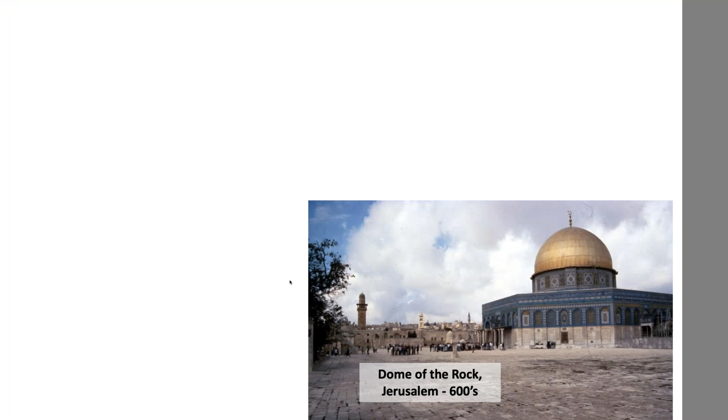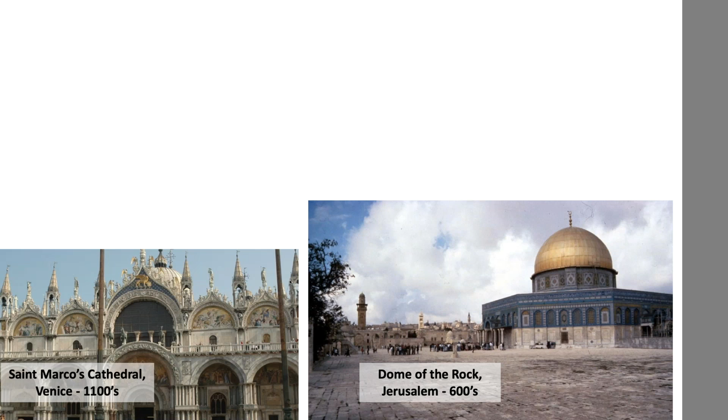But the first thing you need to know is that metal roofing is not something new. It's been around for about 3 millennia, and there are many structures that still exist. You're looking here at Dome of the Rock in Jerusalem, which was built like 1,400 years ago following the Arabic conquest of that city, and many other applications throughout Europe and the Middle East, and in truth all over the world. It's not a new thing.

Interestingly, it sits on top of the Jewish temple ruins, Temple Mount as it's called, and the very first recorded history I saw of metal being used as a roofing material is actually in the book of Kings and 2nd Chronicles. It was Solomon's temple. So Solomon's temple, the way I read scripture, was also having a metal roof clear back 3,000 years ago. That was about 970 years BC.

And of course, it's used in residential applications as well on millions of homes. Metal roofing is about 31%, that's this year's figures, year to date, of the commercial industrial roofing market as defined by FW Dodge.

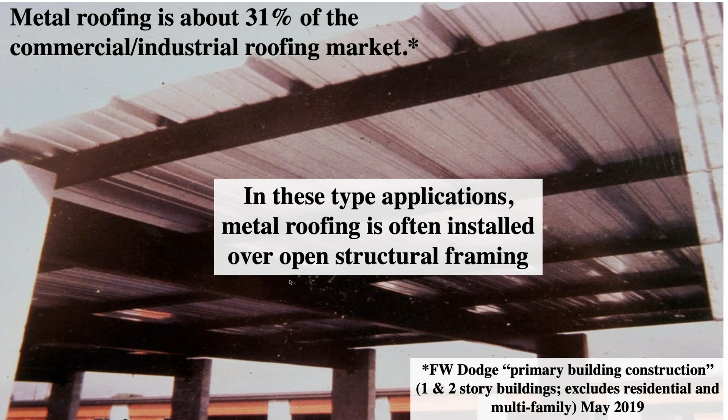And in these type applications, metal roofing, as you see in this slide, is often installed over open structural framing. It's structural roofing, so it's able to carry loads from support to support. And it's about 13% of the residential roofing market. This also is a figure from as of year end last year, 2018, published by the Metal Roofing Alliance.

You don't see metal roofing a lot because in many cases the applications are in very low slopes, as you see here in this slide. So people tend to think, well, gee, there isn't that much metal roofing around, because they're looking at steep slope roofs that are mostly residential applications. And metal only occupies about 13% of that market, which is also a growing figure. But in industrial and commercial, larger projects, it's used quite extensively, more so than any other single roof type.

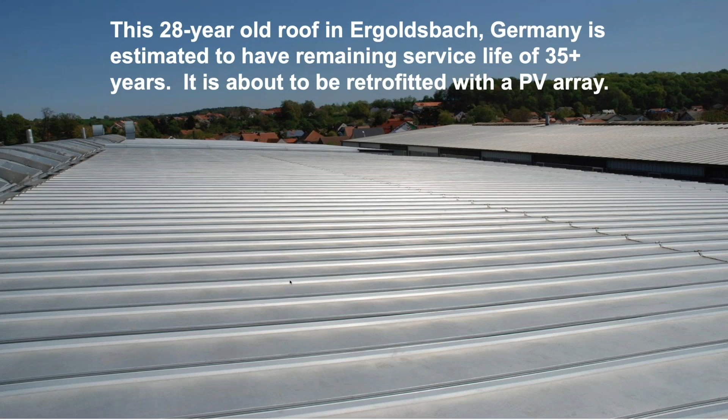Metal roofing is quite sustainable. Galvalume, I trust that many are familiar with the term Galvalume. That's a coating on carbon steel sheet, and that was introduced to the marketplace in the late 70s. And the Galvalume standing seam roof is now proven to have a service life between 60 and 70 years. So coated steel roofs have a service life of over 60 years.

Well, what does that mean to us? What it means is that we can still install solar on a roof that's 30 years old and never have to replace the roof during the life of the solar. So there's an enormous inventory of metal roofing out there, and that's why it's important to know and understand something about it and something about mounting solar on it.

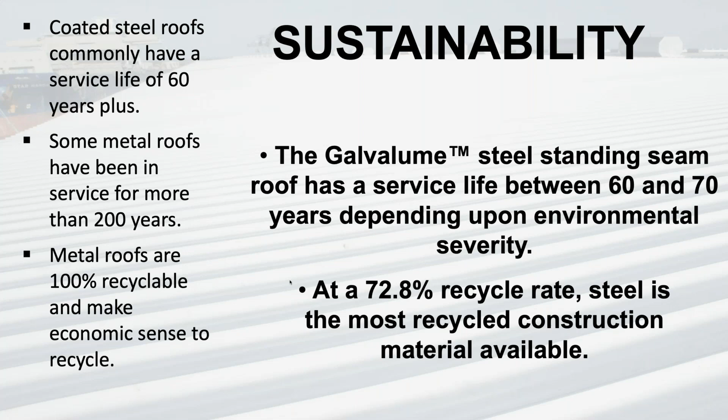Metal roofs, by the way, are also environmentally friendly, as you see in that last bullet. They're 100% recyclable, and they actually make economic sense to recycle. In other words, it's a profitable industry to recycle metal roofing.

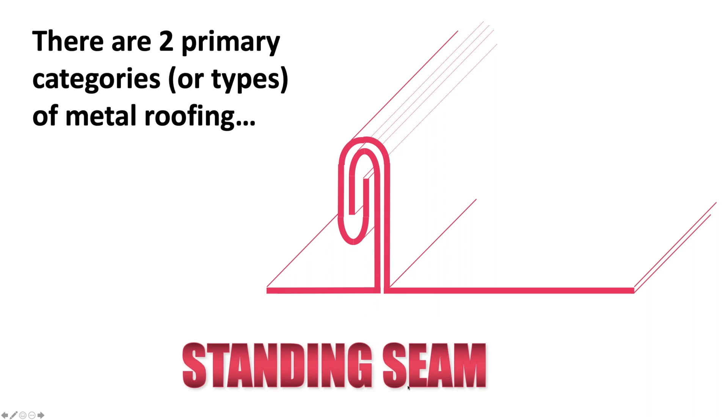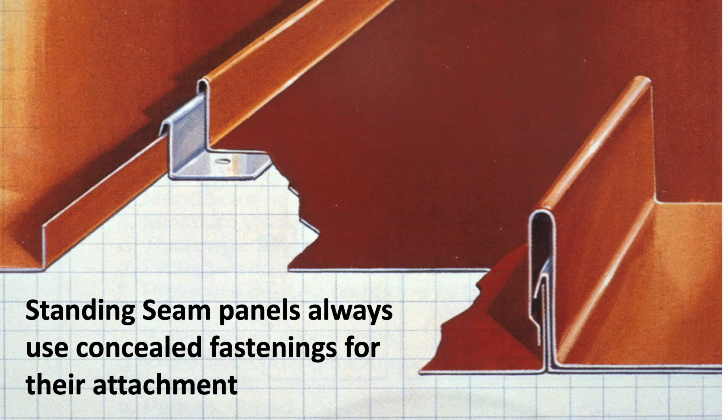There are 2 primary categories or types of metal roofing. The first is what we call standing seam. And standing seam profiles will always use concealed fastenings for their attachment to the building structure. So how do you know when you're dealing with a standing seam roof? Well, if you go up on the roof and you don't see any exposed fasteners, it's going to be a standing seam kind of profile.

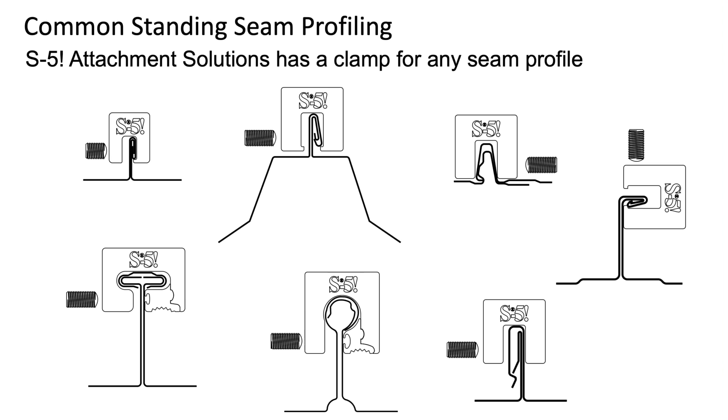And our company, S5 Attachment Solutions, has a clamp for any and all of the commercially available standing seam profiles that we're aware of in North America. This was our original technology, gripping a seam with a clamp, as you see in these diagrams. And I invented that technology back in 1991, patented it in 1992.

S5 is a very innovative company, and we've since come up with other attachment methods that are technically correct for attaching to other roof profiles as well. In fact, in total, we've been awarded, I think, 56 patents to date. Some of the original ones from back in 1992 have expired, but we still have some 40 plus that are active patents.

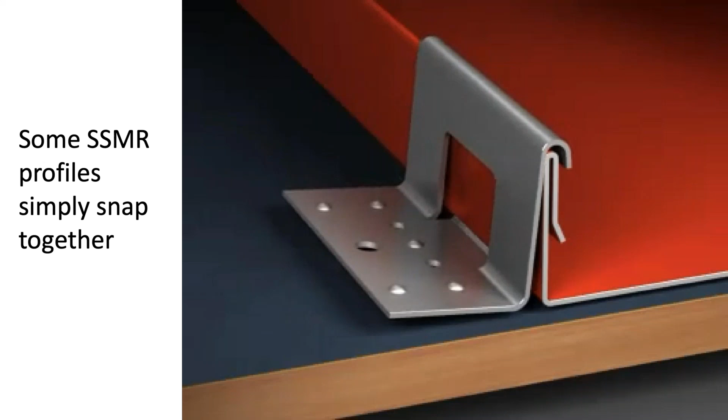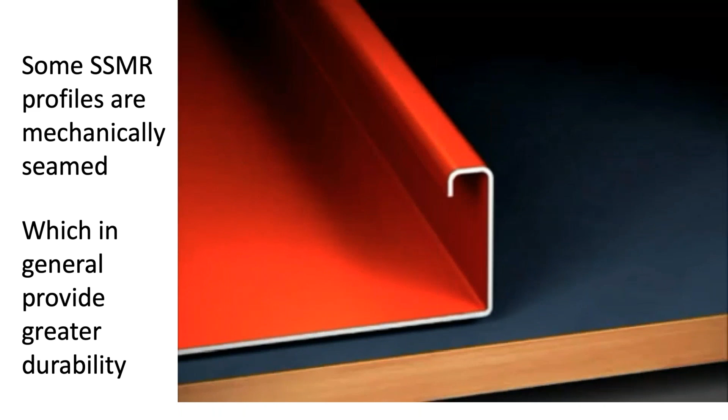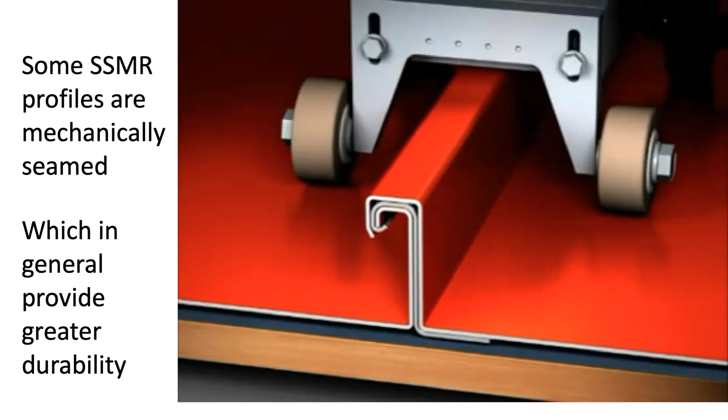Now, standing seam profiles are of two varieties. In the first case, they're snapped together seams, as illustrated by this quick video, where the male and the female components of the seam just snap together in the field. Installers tend to prefer these because they're easier to use than their counterpart, which is a mechanically seamed profile. Mechanical seaming tends to be more durable with respect to its performance under wind uplift pressures and so on. There you see a seaming machine that's closed and finished that seam.

And how do you know if you're dealing with an exposed fastened roof? Well, if you go up onto the roof and you see a multitude of fasteners holding it down to the structure, it's an exposed fastener roof.

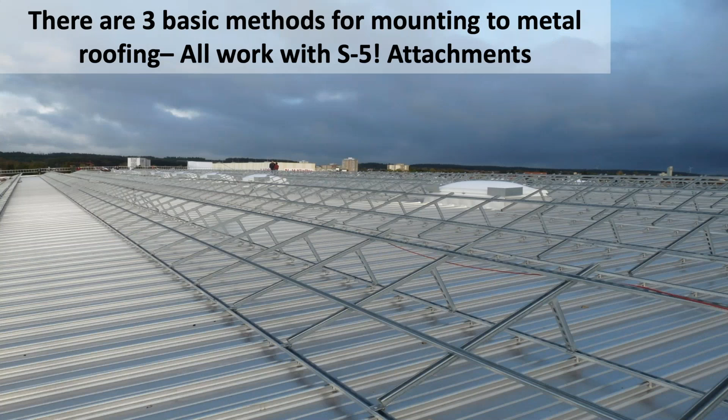So having dichotomized those two major categories of metal roofing, let's get into the methods that are used for mounting to each of them. There are three basic methods for mounting to any metal roof, and all work with S5 attachment solutions. The first is tilting modules to get them to their optimal sun angle.

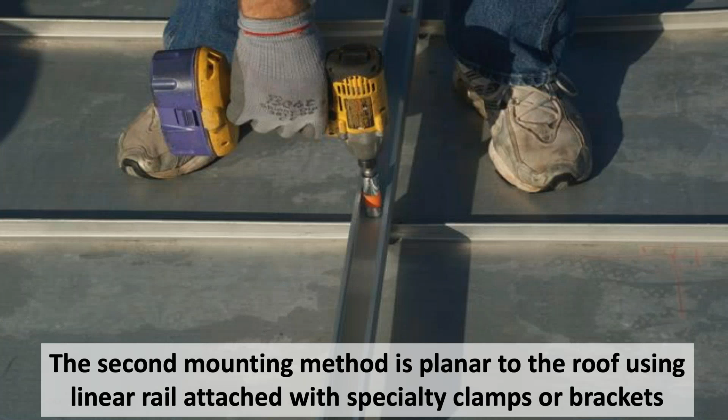And while that was very popular 10 or 12 years ago, as module costs have fallen and the cost of installed solar has fallen, in today's market, the premium cost of tilting is not too often justified economically. And so we're seeing a migration over the last 5 years or so to mounting modules planar to the roof, regardless of the roof slope, and just adding more modules, which proves more economically effective in many cases.

So the second mounting method is planar to the roof using a linear rail. I'm sure that you all are familiar with rail attachment. And the rail is then attached to the metal roof with specialty clamps or brackets, hopefully S5 clamps or brackets. When rail mounting to standing seam, we use a clamp. And as I said earlier, this was a rather revolutionary technology that was invented by S5 in 1991.

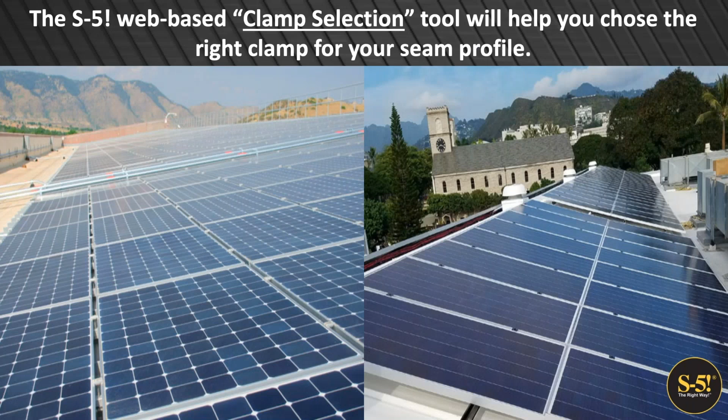Because there are many different seam profiles out there, we have a clamp selection tool on our website that'll help you choose the specific clamp to properly fit and achieve the maximum holding strength on any individual profile. Simply go to our home page and click the Learn More button, or go to the Resources drop-down menu at the top of the screen and select the clamp selection tool. And that'll give you some handy tips and graphics as to fitting certain S5 specific parts to specific seam geometries.

When rail mounting on face fastened profiles, S5 has 4 different options to attach rails. The first one attaches to sheet only, and the other 3 to structure. So we'll take a quick look at each one of them. There are some features and benefits to each one of these components that make them different from the next, and you get to choose what your preference is.

The Protea bracket works with either a side or bottom mounted rail. It can be used in either axis. It is height adjustable, requires no L-foot, as you can see in that image. The L-foot is part of the component offering, and that L-foot will turn around different ways. You're looking at it in a bottom mount rail orientation. You flip it over and it works in a side mount orientation.

As I said, it's height adjustable. No L-foot required or recommended. If you stand an L-foot on top of what you see in this slide, you're creating a moment arm. You're getting that moment arm so high that our tested holding strengths become invalid, because we don't test our parts that way. The next part is a solar foot.

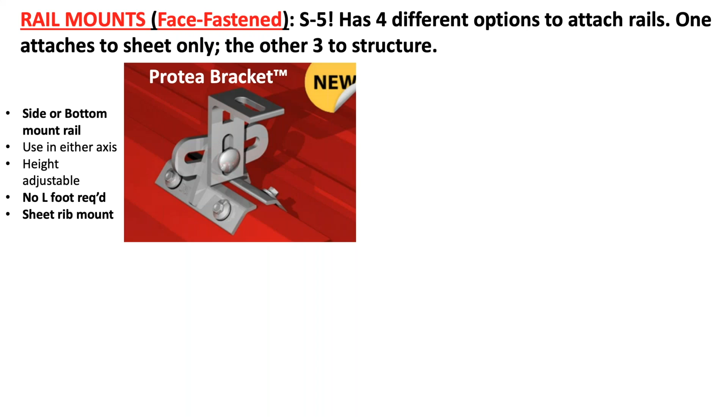So the advantage to the first one, the Protea, is that you can attach anywhere along the rib or seam of the roof. With the solar foot, you're attaching in the flat. This is a structural only attachment. It goes through the roof and into the structure, and it's compatible with any domestic rail producer's L-foot. In fact, any L-foot sold in the world that we're aware of. And it will mount rail in either axis on the roof as desired.

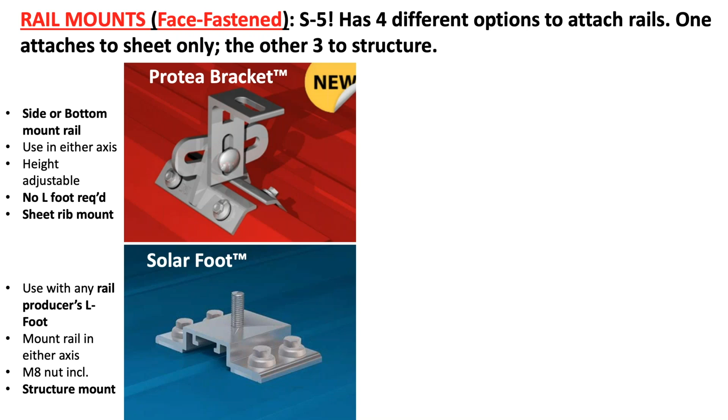The M8 nut isn't shown in that image, but it is included with the part. And as I said, it must attach to structure, and that's the way it's tested. It is height adjustable, and no L-foot is required with that part either. It sort of melds an L-foot with a solar foot all in one part for side-mounted rail. It again mounts to structure.

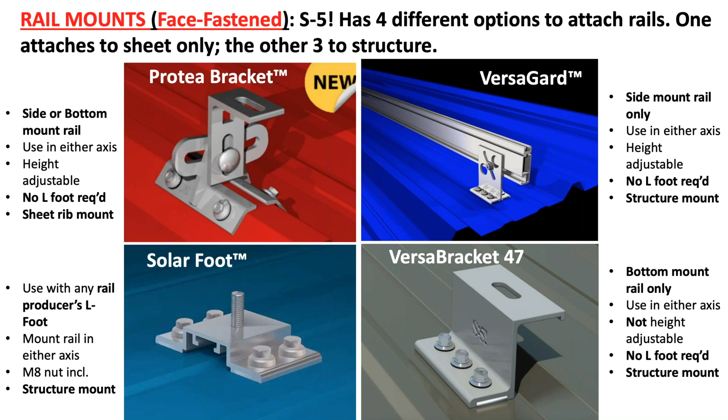And the last one is the VersaBracket 47. We also have a little bit taller one, which is called the VersaBracket 67. And this is for bottom mount rail only. Again, it can be used in either axis on the roof. It's not height adjustable. And once more, no L-foot is required or recommended. And it also attaches to structure. All these components have factory applied sealants that are tested in assembly to ASTM 2140, which is a static water test.

It's like a fishbowl test, where the joint of the S5 part to the roof itself is submersed under a minimum of 5 inches of static water head and held for 5 hours. If it leaks a drop, it failed. And those sealants are the same kind of sealants that have been used within the metal roofing industry for 50 or 60 years. So they can be expected to have a life equivalent to the roof.

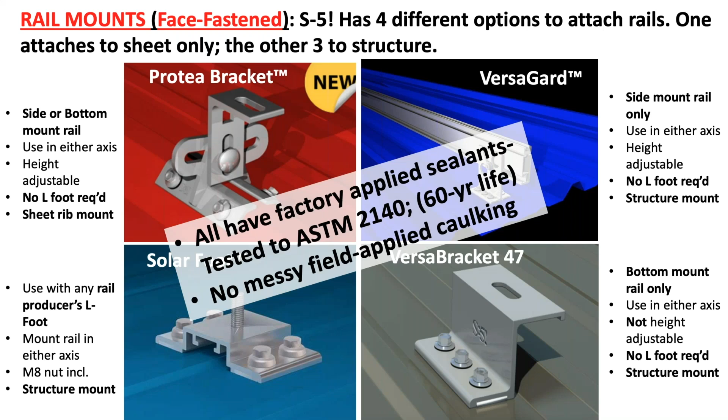And you don't ever need messy field applied caulking. More is not better. Please don't goop caulking on top of these parts, because any surface applied sealant like that is not going to last.

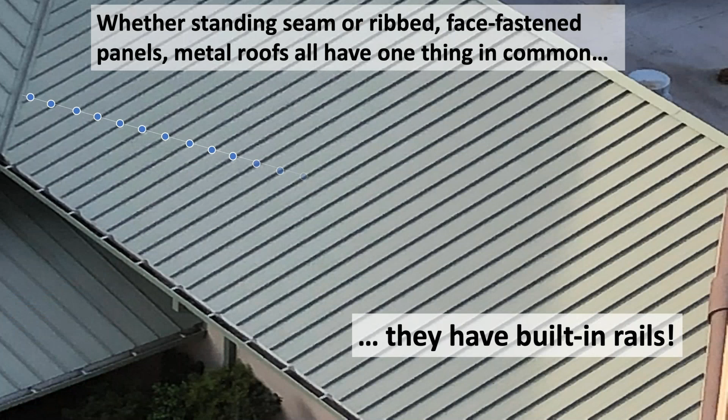The third mounting method then is called direct mounting or direct attach, which is a term trademarked by S5 many years ago. Direct attach is gradually becoming the norm for metal roofing, and that's because whether it's standing seam or face-fastened profiles, they all have built-in rails. They all have this thing in common. They have built-in rails that are integral to the profile of the roof panel. And they're quite convenient for solar mounting. And there are plenty of them, and they're free.

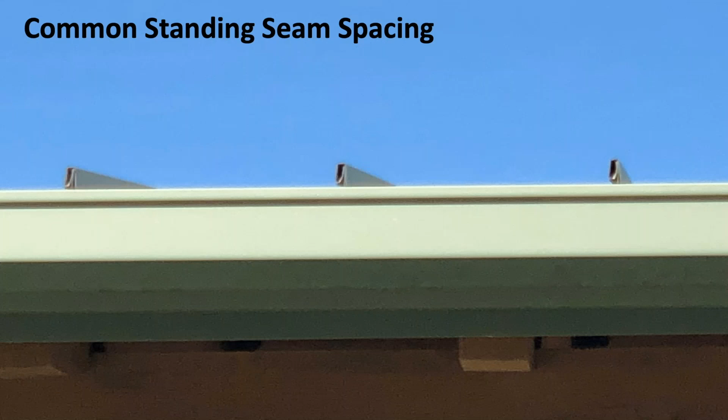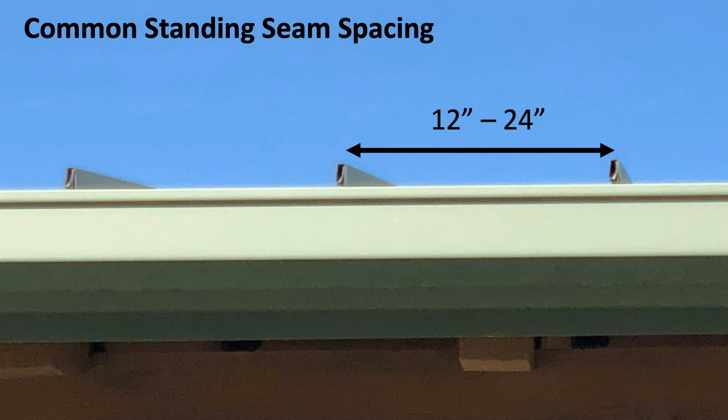Common standing seam spacing is between 12 and 24 inches. You may occasionally run into a seam spacing that's either side of this window, but it would be very occasional. In the case of exposed fastened profiles, the rib spacing is normally 6 to 12 inches. So you have even more rails available inherent to the roof profiles on exposed fastened.

So using the rails that are already there, that are plenteous and are free, all that's needed now is some widgetry, that's a technical term, that marries the module to any S5 bracket or clamp, which is then in turn mounted directly to those rails or roof seams or ribs.

So we've recently introduced, recently being within the last 2 years, the Generation 2 S5 PV kit. What we did was we took every annoyance that we heard. We do stay in touch with our customers and we communicate with them pretty regularly, and we actually listen. And we took every negative thing that they found about our Generation 1 PV kit and eliminated all those things and improved it quite a lot.

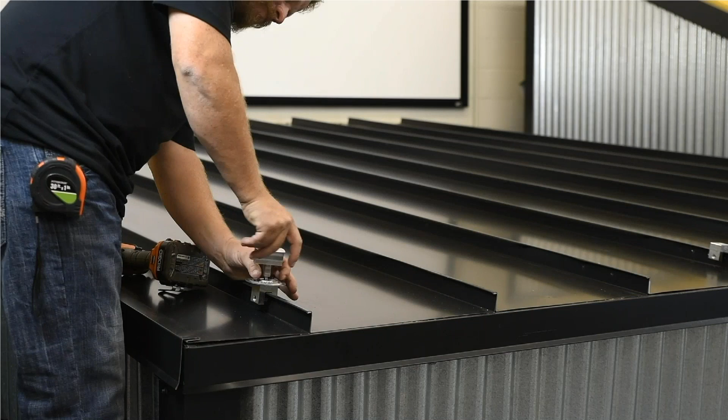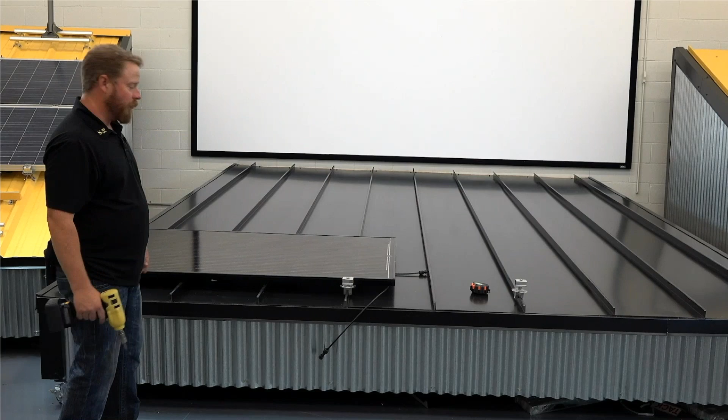You see them now attaching the PV edge kit by hand and then tightening it down just a little bit, but leaving it loose enough just to hold that module in place so it doesn't blow off the roof. And here you can see that he's using the module as a spacer tool, installing the next clamps at the top side of the module, and those will be left loose just a little bit as well.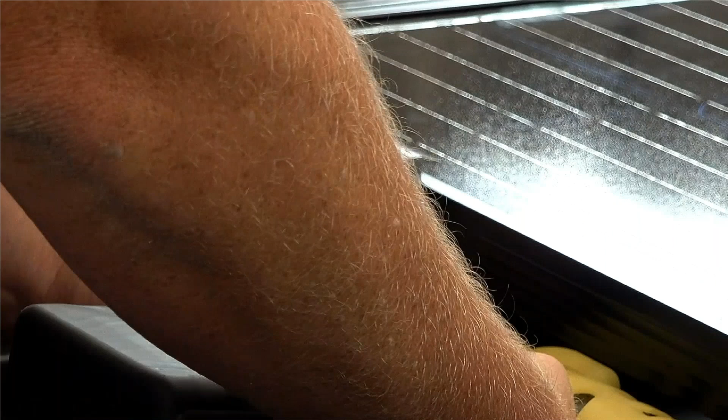And he's explaining there why they're left loose, so that you can bump them around and adjust them and get them aligned just right before you do your final tightening. So you'll repeat that procedure starting at the bottom. Normally you could start at the top, but it's a little easier to start down at the eave and work your way up. And then when you've got the whole column installed but not tight, you align them to your satisfaction and tighten them down.

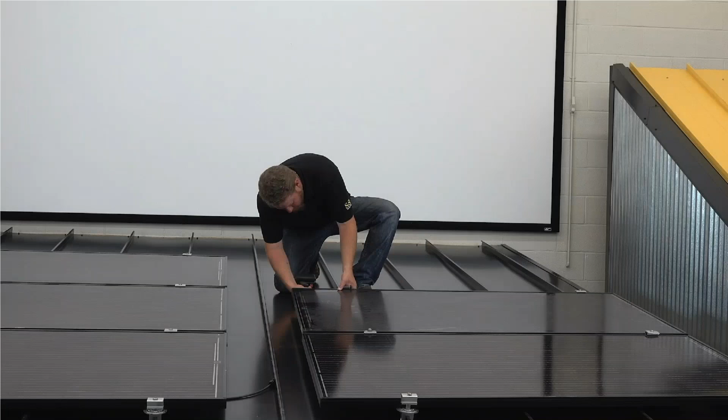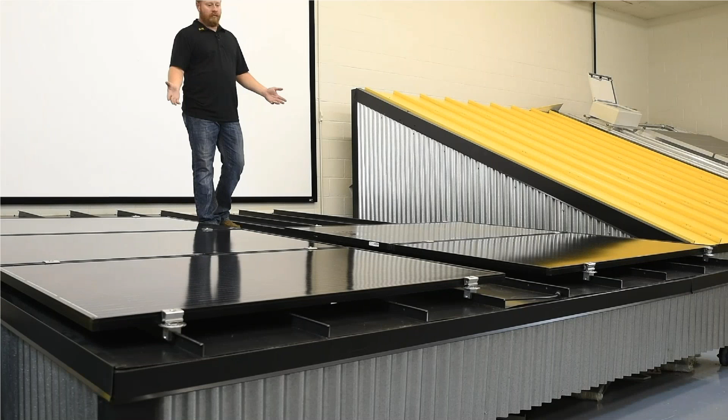And then move on to the next column of modules, that is. What he's telling you here is before you go home at the end of the day, if you haven't finished that column and you've left it loose, make sure to tighten it down in a few places so you don't lose your modules in a windstorm.

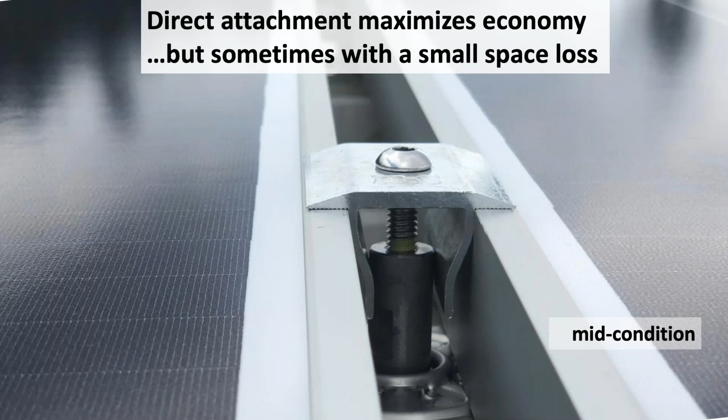And he's also explained there at the end, you saw the space between those module columns. That space was left intentionally to create a walk space, and that's what he was demonstrating there, so that you can access any module on the roof if desired. Normally, though, you would buddy up 2 module columns, and then you'd just leave a walk space on either side of that pair of columns. But that's an option. You don't have to do that. It's kind of optional. Direct attachment in this fashion maximizes economy, but occasionally with a small space loss.

You're seeing here the ground path. I'm going to come back to the space loss. You see the ground path here from module frame to module frame through that patented disc. It's got little scratcher teeth on it so that it breaks through the anodization coating on the modules to establish a ground path. No need for jumper wires here, except perhaps to connect one column of modules to the next column of modules. No need for additional components, WEEBs, or anything like that.

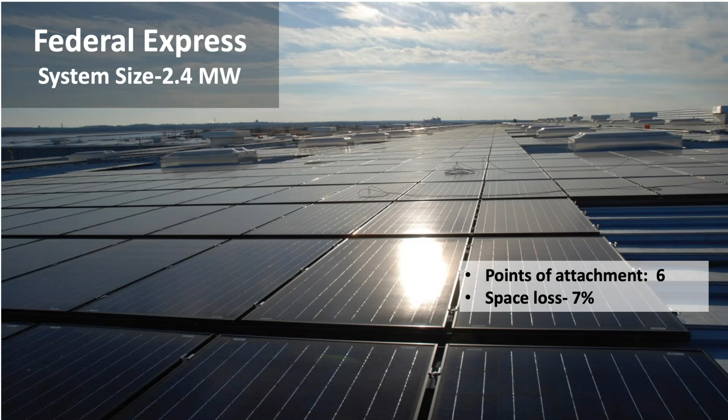So here we see an example, and this is about a worst case of space loss. It's 7%. On this particular job, you see how long this roof was. And in this case, they wanted access paths, and they had plenty of roof space. And so this was actually a customer preference that they be able to access any module on the roof at any time. And they left these spaces between modules and lost about 7% of the usable roof space. But as I said, it was a customer choice, and they had plenty of roof space.

You'll also notice here that these modules are attached at 6 points. Normally, only 4 points. That'd be 2 points on each side of the module, and of course they're ganged together, so that each one would be attached in 4 spots, which is common in the solar industry, as I'm sure you know. But in the event of increased wind pressures in certain zones of the roof, or increased wind speeds in places like the Florida Keys or coastal Florida, hurricane zones in the Caribbean, you have more ribs available to attach to than you have to attach to. So in those kind of wind environments, they're there and you can attach to them and increase the wind resistance of your finished array.

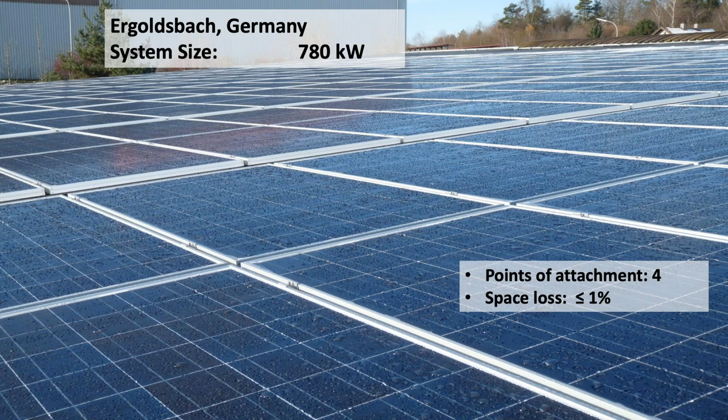Conversely, here we see this project in southern Germany that's using 4 points of attachment, which is more normal, and the space loss is less than 1%. You can see a 1% space loss really isn't a space loss. I don't think another column of modules could have been fit on this roof, such as in this case at Ergoldsbach. If you look closely at that slide, I don't know if you can see my cursor here. You have a little correction gap here and here.

Every 7 columns of modules, you have a little correction space, and that's there for thermal expansion relief as well. But that space was only about 4 or 5 inches wide. If you would add that all up 6 times or 7 times, however many times it occurs here, you still wouldn't be able to get an extra module column on this roof. So it's really a 0 space loss.

This one in Puerto Rico, right in between, about a 5.5% space loss, and this one using 4 points of attachment as well. This was on a face fastened roof, as you can see.

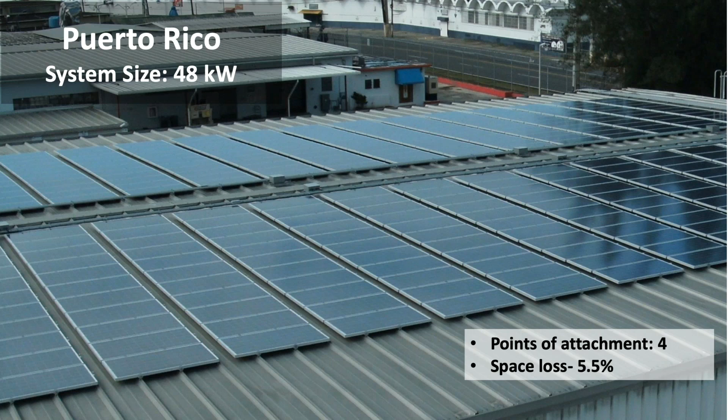An interesting question that often comes up, when we talk about direct attach as opposed to rail attachment, is this question: well, my rails are putting the glass much higher in some cases than your direct attach methods, and I'm worried about optimal airflow to keep the modules cool so that they're more efficient and so on. So this is a valid question. What clearance dimension is really required for optimal airflow beneath the module?

Now, if you ask a module manufacturer, he's going to tell you, well, more is better. Try to give us at least 6 inches, but more is better. Well, the module producer doesn't have a hound in that hunt. He doesn't care if you spend an extra 20 cents a watt to get a module up high. He just knows that higher is better.

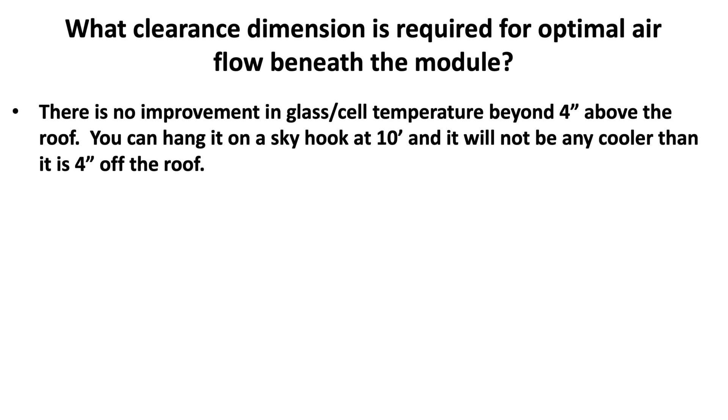There actually is no improvement in the cell temperature once you're 4 inches above the roof. You could hang it on a pole at 10 feet high, and it would not be any cooler than it is 4 inches off the roof. In fact, that's exactly what was done at a Department of Energy Los Alamos research project. They hung one on a pole as a control sample, and they measured the performance difference, which is directly related to module temperatures, at 2 inches, 3 inches, 4 inches, 5 inches, and 6 inches. And there was no change from 4 to 6 inches. And the change from 3 to 4 inches was only about 3.5%.

We've also concurred with those findings from simply measuring module temperatures side by side on modules at the S-5! Ranch from 4 and 6 inches. And there's absolutely no temperature difference whatsoever. In fact, in some cases, we might have measured 1 degree hotter at 6 inches than at 4, and the next day or a week later it might have switched, but most of the temperature readings we got were absolutely identical in both cases. And in fact, there is a downside to putting more space beneath the modules because it aggravates wind uplift effects on those modules.

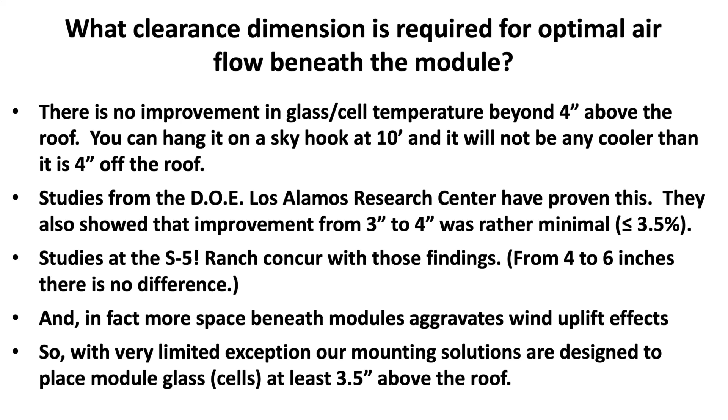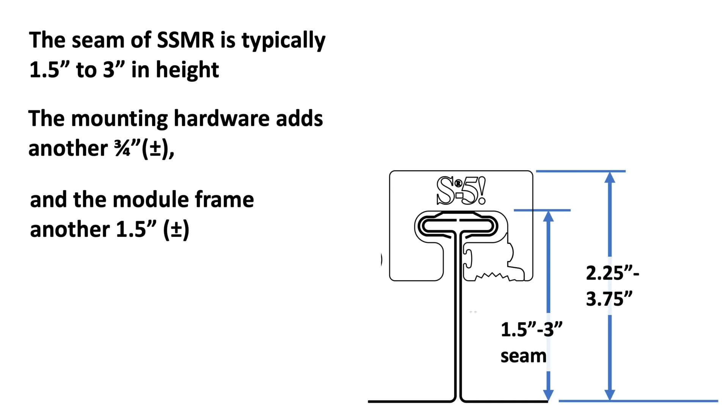So with very limited exception, our mounting solutions are all designed to place module glass at least 3.5 inches above the flat plane of the roof. I'm not referring to the standing seams, but to the flat part of the roof. And in most cases, we exceed that. Here's an example in cross section. Standing seams are typically 1.5 to 3 inches in height, so that dimension is going to vary from roof to roof. The mounting hardware adds another 3/4 of an inch or so, and then the module frame another 1.5 inches. Clamp to seam type hardware and PV kit.

When you look at our direct attach for face fastened roofs or exposed fastened roofs, we'll get to the dimensioning here in a minute, but one thing you'll notice is that we always try to attach to the slanted wall of the rib as opposed to attaching a simple part to the top of the rib. And the reason for that is it puts those fasteners, under wind uplift pressure, in shear rather than in direct pullout. And their holding strength in shear is exponentially more than their holding strength in direct pullout.

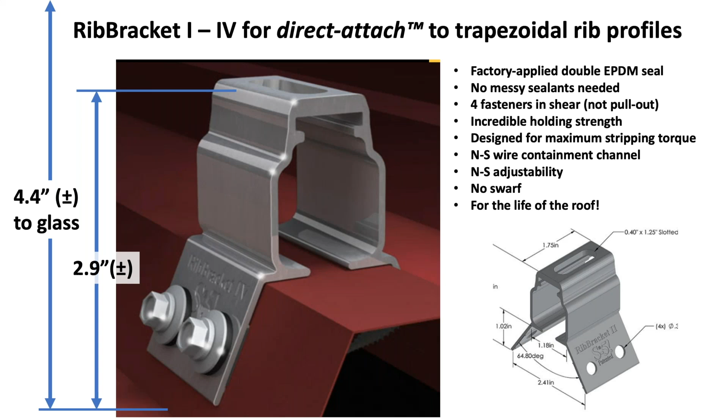Also, that channel there can be used for wire containment. You have infinite north-south adjustability here because you're mounting it anywhere along that rib that you want to. Swarf is drilling debris; we don't use a drill fastener, we use a self-piercing fastener, so it eliminates any drilling debris on the roof, which can tend to rust and stain the roof. Coming back to the dimensional things, you see that generally speaking, you have at least 4.4 inches when using this part with our PV kit.

And we already saw this part when applicable to rail mounting. The Protea can also be used for direct attach methods with our PV kit, and that's what you see being illustrated here. Similar sort of principle. This part is very, very versatile. It'll fit almost any rib size up to a 3-inch wide dimension across the dimensions that vary on these profiles.

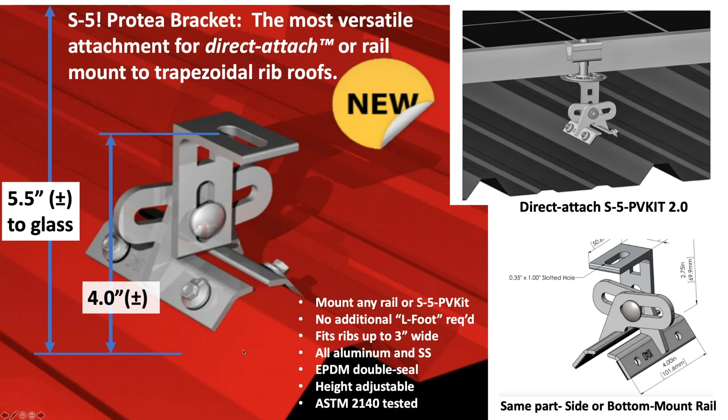If you can follow my cursor, this dimension across the top of this rib varies quite a bit. The angle here varies to some degree as well, and the rib height also varies. But this part fits ribs up to 3 inches wide. As I pointed out before, it can be used for rail attachment, it can be used for direct attachment. It's really a cool and nifty part. It's very versatile, but it is more expensive than some of the other options. It's one of our most popular parts, however.

We even have mounting brackets for corrugated metal roofing. Now, this is another type of exposed fastener roof, the corrugated, the sinusoidal wave effect that you see there. Many in the industry call anything with a rib corrugated, and that's not technically correct. You're looking at a corrugated profile here. The others are trapezoidal rib profiles. But even on our corrugated profile, which has a very low corrugation height, we're putting glass 3.8 inches above the roof.

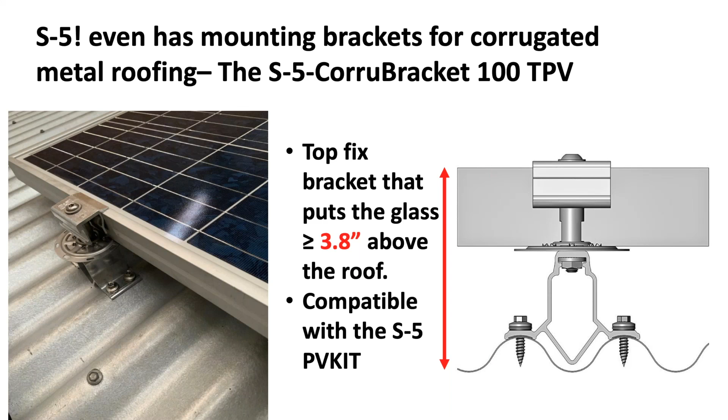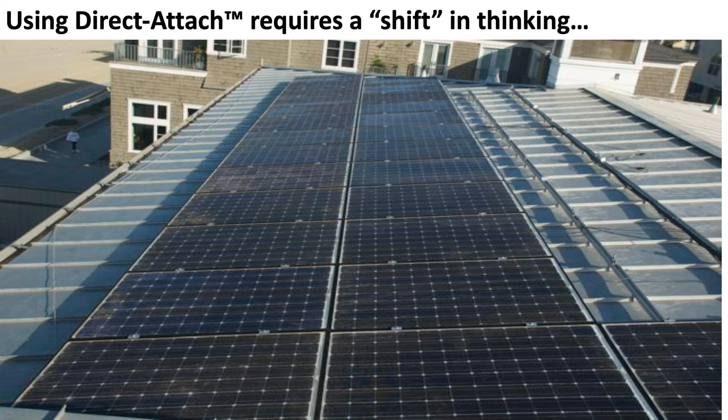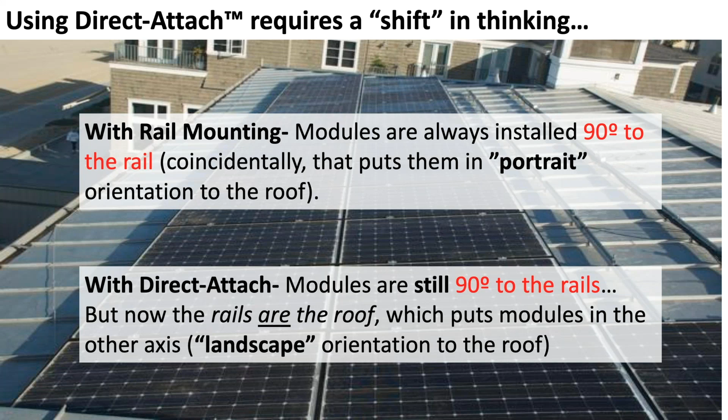Now, when you consider direct attachment, it requires a shift in your thinking. When you're rail mounting, the modules are always installed 90 degrees to the rail. That puts them in portrait orientation to the roof. With direct attach, modules are still 90 degrees to the rails, but the rails have now become the roof, which puts them in the other axis or landscape orientation.

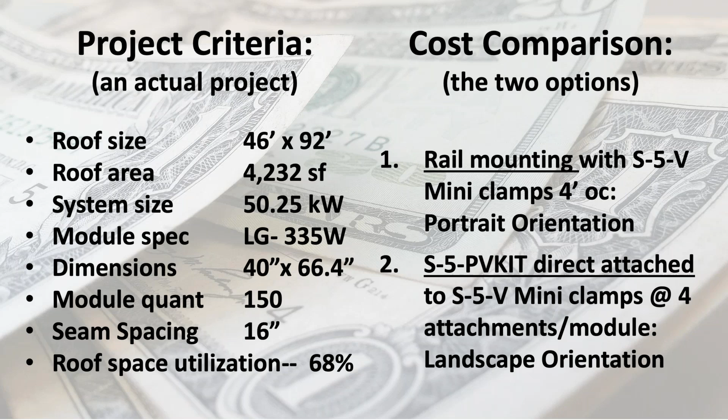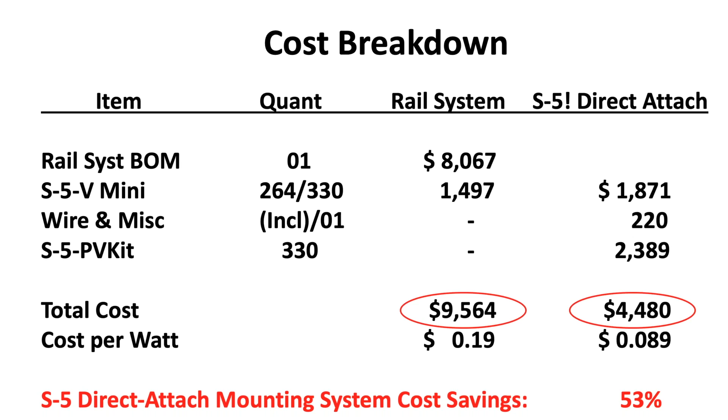What we want to look at is the total costs involved here. I'm going to flash them up real quick, but you can see the breakdown and the total cost figures there, cost per watt. And the direct attach mounting system saves 53% of the total cost in this case. Let's look at some other factors. Of course, cost is always a driver, but there are some other benefits as well.

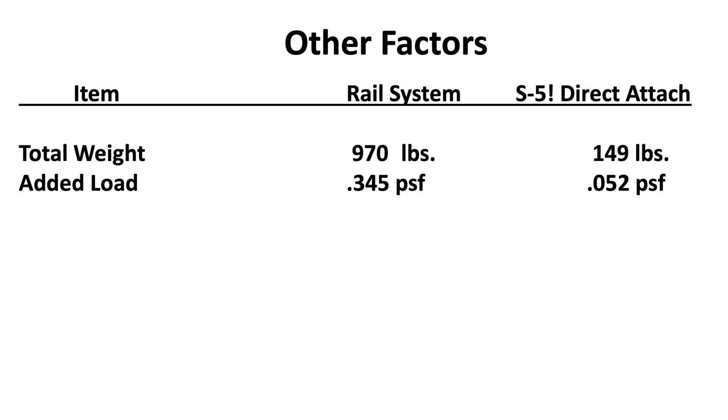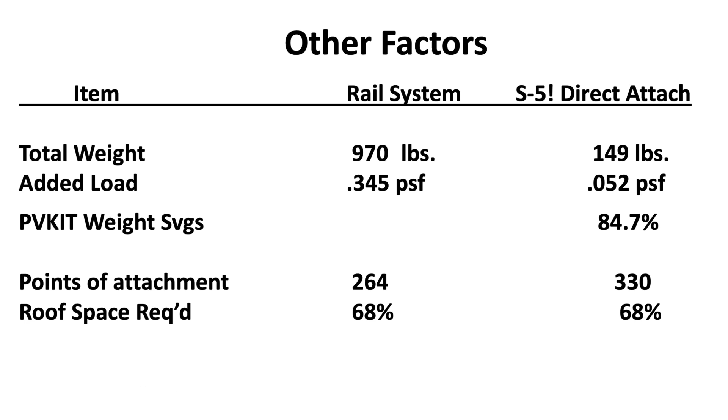The weight of the rail system was 970 pounds. The weight of the S5 direct attach system, 149. That's added load of only a fraction of the added load of the rail system, and that fraction is actually 15%. So direct attach is 15% of the weight of the rail system. And the points of attachment are actually increased, both requiring the same roof space.

When you think about the weight thing, think in terms not only of the weight on the roof structure, but of transportation costs and material handling logistics, both to the job site and once there, unloading from the freight carrier, finding a place to stage it at your shop, reloading onto the headache rack of a service truck, unloading at the job site, handling those rails up to the roof, staging them on the roof and layout and so on, not to mention field cutting to length as may be necessary.

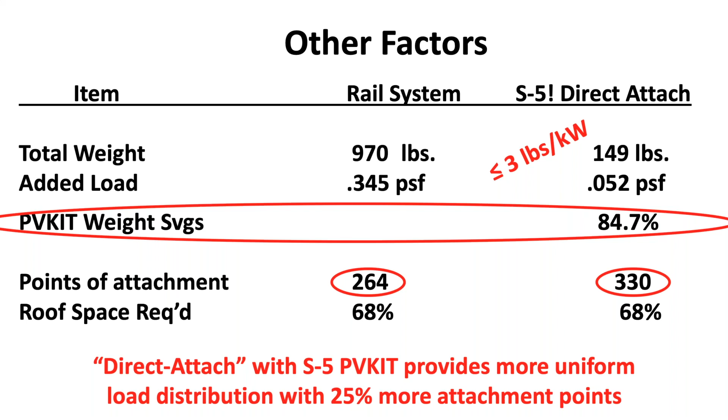Look at the weight and the physical size of S5 direct attach components. You can forget the service truck. You can put all these components in the trunk of your Mini Cooper and head up the ladder with a 5-gallon bucket for a system size of 8 to 10 kW. Then that bucket's going to weigh 25 or 30 pounds. You're also providing more uniform load distribution into the roof because you have 25% more attachment points than with rail mounting.

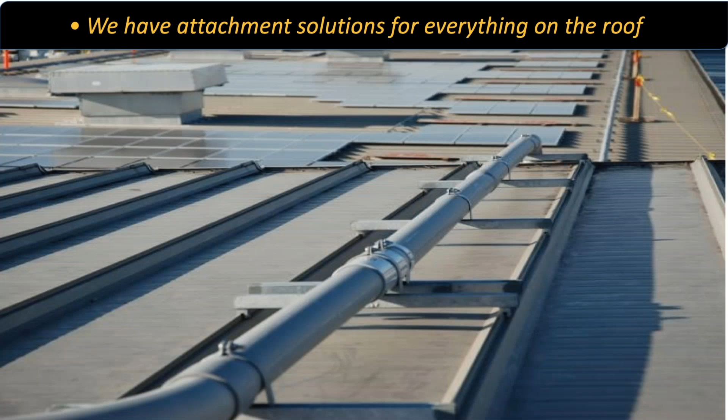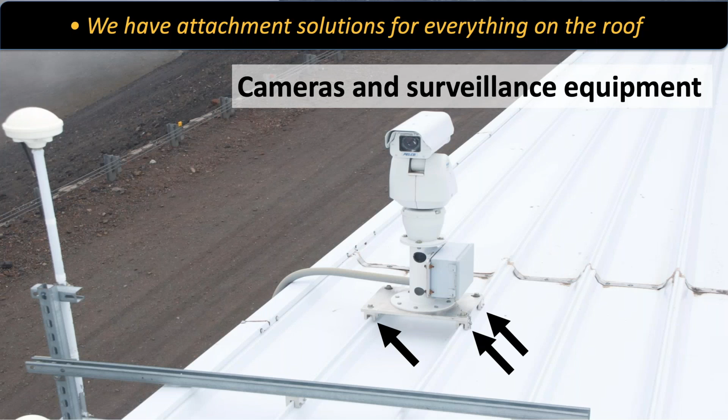So why is S5 the right way? Well, it's not only for the reasons you've just seen, but we have attachment solutions for everything on the roof, including wire management, combiners, inverters, service walkways, fall protection, other roof mounted equipment, weather monitoring equipment.

Another reason why S-5 is that we have a 27-year history and over 2 gigawatts of successful PV installations without a single documented failure, and a 25-year warranty on all our components. We know something about compliance standards and code approvals. In fact, we helped to create many of them.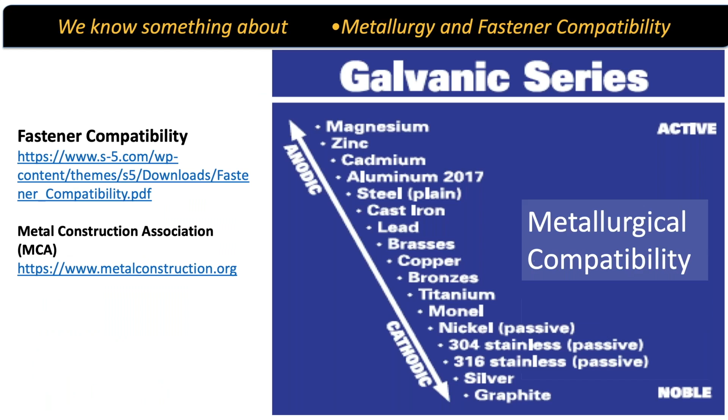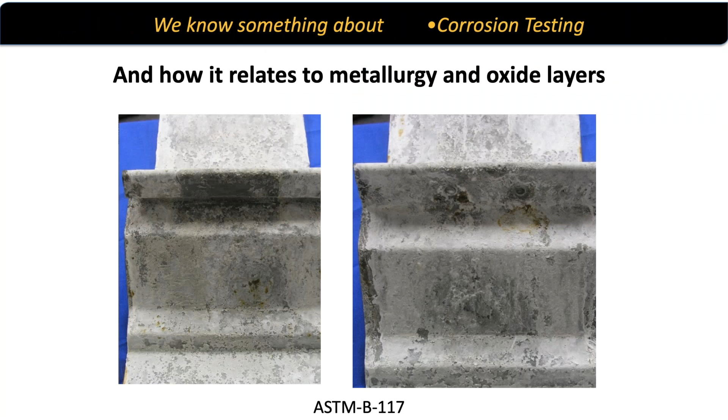We know something about metallurgy and galvanic compatibility and fastener compatibility. And we know something about corrosion testing. We've done all kinds of corrosion testing. Here you're looking at a typical example of an ASTM B117 corrosion test after 1,000 hours at a clamp location, and here after 2,000 hours.

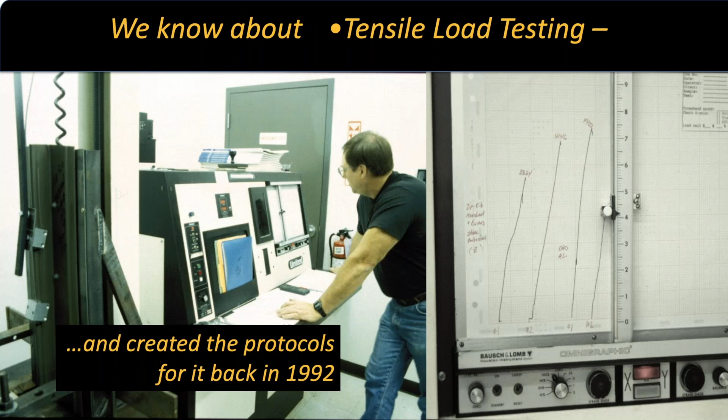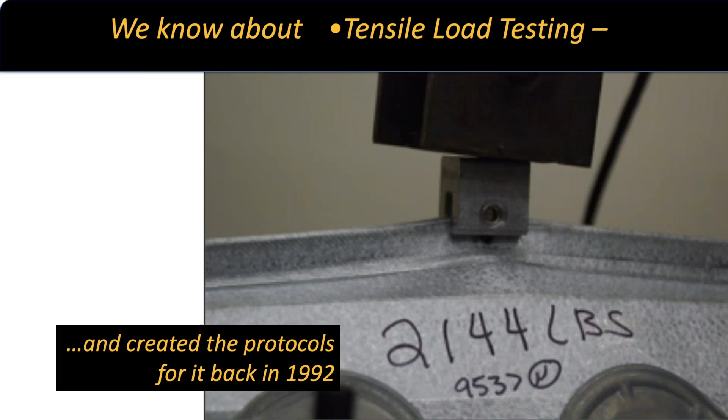We know all about tensile load testing, and we in fact created the protocols for tensile load testing of clamp-on-seam back in 1992. Notice the load there before failure of 2,100 pounds. And you can find all that data published right on our website.

We've published mechanical load test data from over 3,000 individual pull tests on 500 roof profiles in all different seam geometries and material thicknesses and material types. And full lab reports are available for any of those on request for engineering purposes.